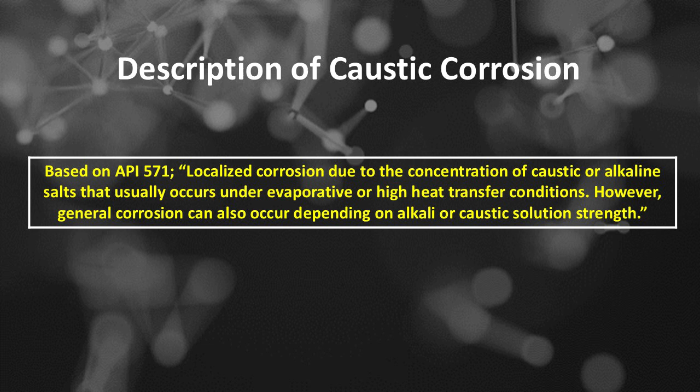Number 1 is caustic corrosion damage definition. Caustic corrosion refers to the degradation of materials, typically metals, due to the corrosive effects of alkaline substances, specifically those containing hydroxide ions, OH. This type of corrosion is often associated with environments where caustic substances, such as sodium hydroxide, caustic soda, potassium hydroxide, or other alkaline solutions, are present.

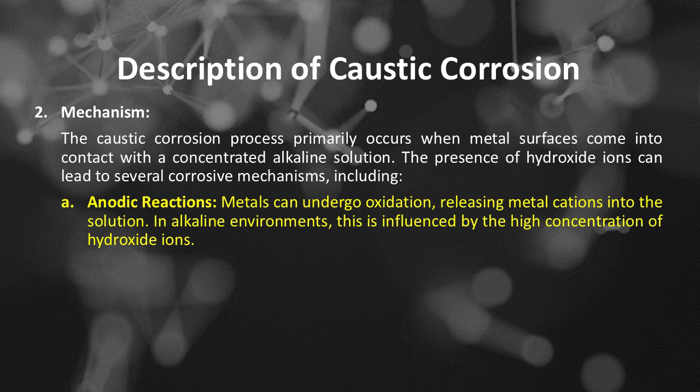Caustic corrosion is particularly significant in industries that utilize strong bases, such as chemical processing, pulp and paper manufacturing, and petroleum refining. Number 2 is mechanism. The caustic corrosion process primarily occurs when metal surfaces come into contact with a concentrated alkaline solution. The presence of hydroxide ions can lead to several corrosive mechanisms, including: Number A of corrosive mechanisms is anodic reactions. Metals can undergo oxidation, releasing metal cations into the solution. In alkaline environments, this is influenced by the high concentration of hydroxide ions.

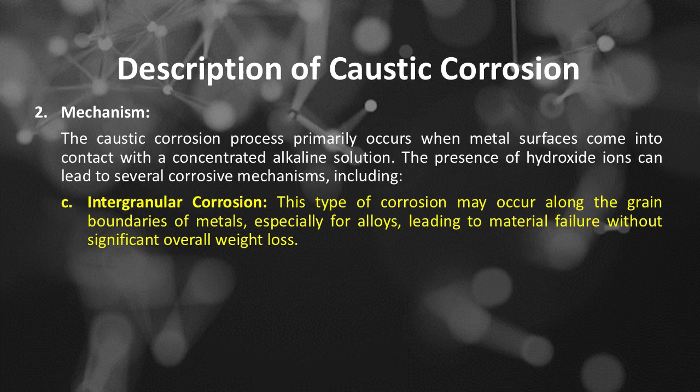Number B of corrosive mechanisms is localized attack. Caustic corrosion can cause localized attack, often referred to as caustic stress corrosion cracking, SCC. This phenomenon occurs when stress is applied to susceptible metals, resulting in the formation of cracks that propagate through the metal structure. Number C of corrosive mechanisms is intergranular corrosion. This type of corrosion may occur along the grain boundaries of metals, especially for alloys, leading to material failure without significant overall weight loss. Number 3 is affected materials.

While many materials can be affected by caustic corrosion, certain metals and alloys are more susceptible, including carbon steel, commonly used in various applications but can suffer from caustic corrosion, particularly in high-temperature and high-pressure environments. Certain stainless steels. While stainless steels have good corrosion resistance, certain grades may still be vulnerable, especially when exposed to elevated temperatures and stress. Copper and alloys. Copper and its alloys may experience accelerated corrosion when exposed to caustic environments.

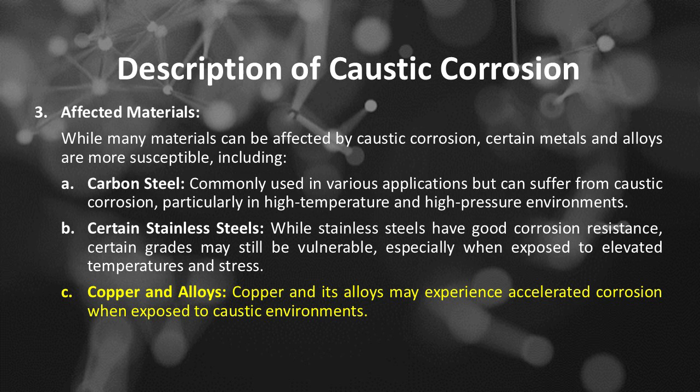Number 4 is conditions that promote caustic corrosion. High pH levels. The corrosivity increases significantly as pH levels rise, particularly above pH 12. Temperature. Elevated temperatures can exacerbate the effects of caustic corrosion by increasing reaction rates. Aeration. The presence of oxygen can facilitate electrochemical corrosion processes. Concentration of caustic solution. Increased concentration of hydroxide ions enhances corrosion rates, particularly in closed or poorly ventilated systems.

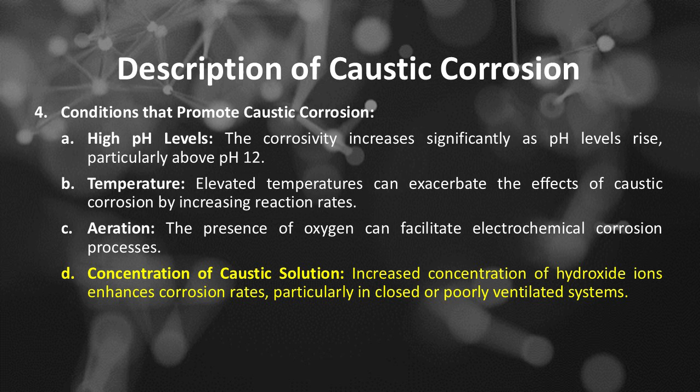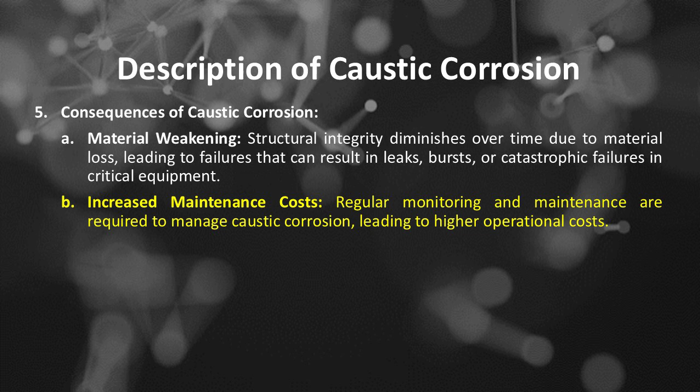Number 5 is consequences of caustic corrosion. Number A is material weakening. Structural integrity diminishes over time due to material loss, leading to failures that can result in leaks, bursts, or catastrophic failures in critical equipment. Number B is increased maintenance costs. Regular monitoring and maintenance are required to manage caustic corrosion, leading to higher operational costs. Number C is safety hazards. Structural failures can pose significant safety risks to personnel and can lead to environmental contamination in the case of spills.

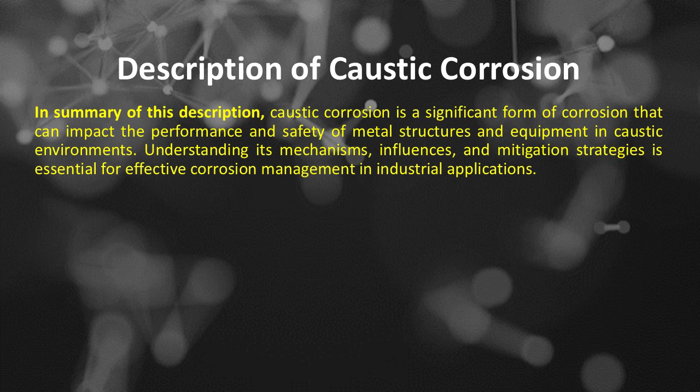In summary of this description, caustic corrosion is a significant form of corrosion that can impact the performance and safety of metal structures and equipment in caustic environments. Understanding its mechanisms, influences, and mitigation strategies is essential for effective corrosion management in industrial applications.

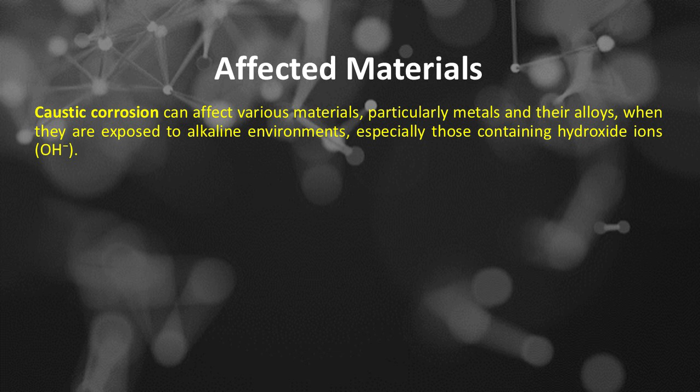Caustic corrosion affected materials based on API 571: primarily carbon steel, low alloy steels and 300 series SS. Caustic corrosion can affect various materials, particularly metals and their alloys, when they are exposed to alkaline environments, especially those containing hydroxide ions, OH. The following materials are commonly affected by caustic corrosion. Number 1 is carbon steel. Carbon steel vulnerability: carbon steel is particularly susceptible to caustic corrosion, especially in high-temperature and high-pressure environments. Carbon steel consequences: corrosion can lead to pitting, loss of structural integrity, and potentially catastrophic failure if not monitored and maintained.

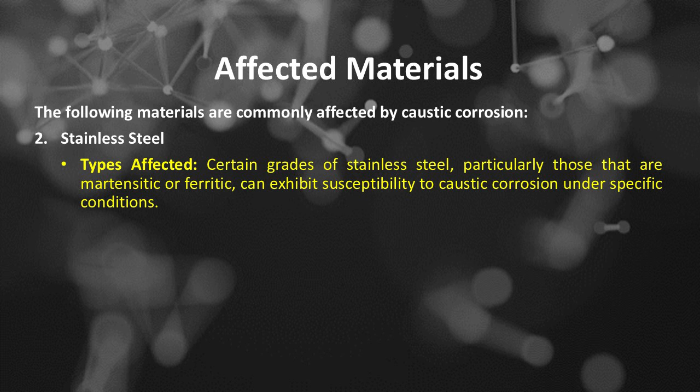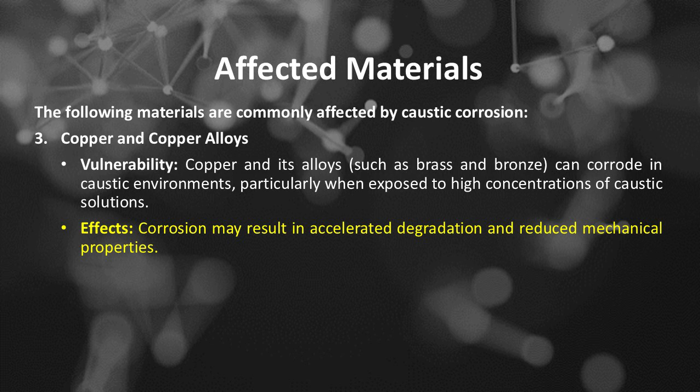Number 2 is stainless steel. Stainless steel types affected: certain grades of stainless steel, particularly those that are martensitic or ferritic, can exhibit susceptibility to caustic corrosion under specific conditions. Stainless steel mechanism: localized corrosion, such as stress corrosion cracking, SCC, can occur when stainless steels are exposed to high pH environments combined with tensile stress. Number 3 is copper and copper alloys. Copper and copper alloys vulnerability: copper and its alloys, such as brass and bronze, can corrode in caustic environments, particularly when exposed to high concentrations of caustic solutions. Effects: corrosion may result in accelerated degradation and reduced mechanical properties. Number 4 is aluminum and aluminum alloys.

Aluminum and aluminum alloys corrosion behavior: aluminum is generally resistant to corrosion, however it can be susceptible to caustic corrosion, particularly in concentrated alkaline solutions that can attack the protective oxide layer. Caustic environments can lead to pitting and localized attack.

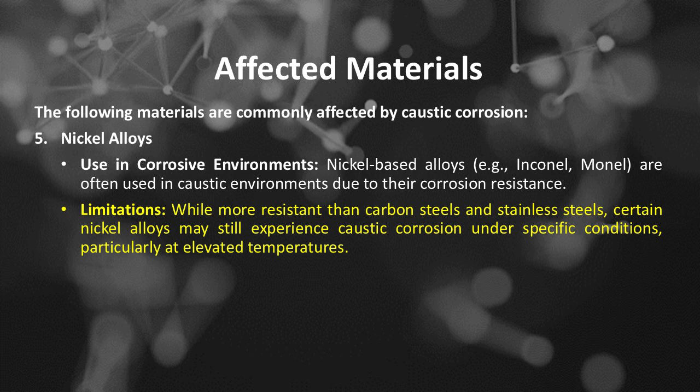Number 5 is nickel alloys. Nickel alloys use in corrosive environments: nickel-based alloys such as Inconel and Monel are often used in caustic environments due to their corrosion resistance. Nickel alloys limitations: while more resistant than carbon steels and stainless steels, certain nickel alloys may still experience caustic corrosion under specific conditions, particularly at elevated temperatures.

Number 6 is titanium. Titanium general resistance: titanium exhibits good resistance to a wide range of corrosive environments, including alkalinity. However, in some high-stress conditions or at elevated temperatures, caustic corrosion can occur. Titanium applications: while less common, caustic corrosion can affect titanium components in specialized applications.

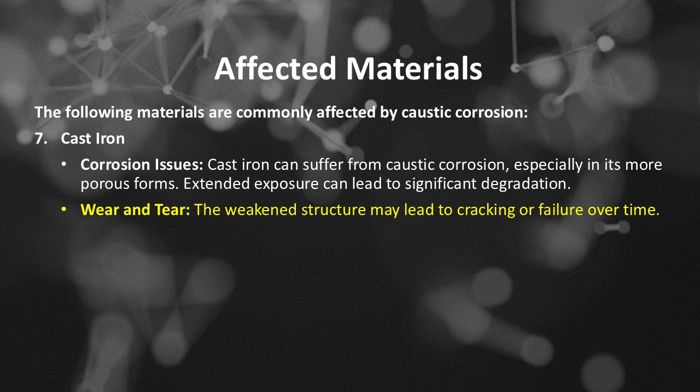Number 7 is cast iron. Cast iron corrosion issues: cast iron can suffer from caustic corrosion, especially in its more porous forms. Extended exposure can lead to significant degradation. Cast iron wear and tear: the weakened structure may lead to cracking or failure over time.

Understanding the susceptibility of these materials to caustic corrosion is crucial in industries such as chemical processing, pulp and paper manufacturing, and oil and gas. Selecting appropriate materials and employing effective protective measures can help mitigate the risks associated with caustic corrosion.

Caustic corrosion critical factors based on API 571. Major contributing factors are the presence of caustic, NaOH or KOH. The following are sources of caustic.

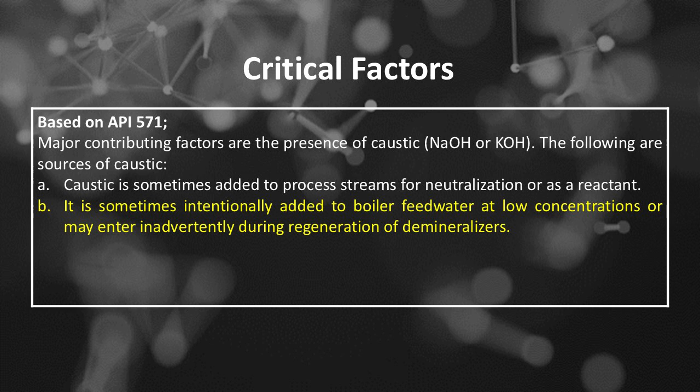A. Caustic is sometimes added to process streams for neutralization or as a reactant. B. It is sometimes intentionally added to boiler feedwater at low concentrations or may enter inadvertently during regeneration of demineralizers. C. Alkaline salts may also enter process streams through leaks in condensers or process equipment.

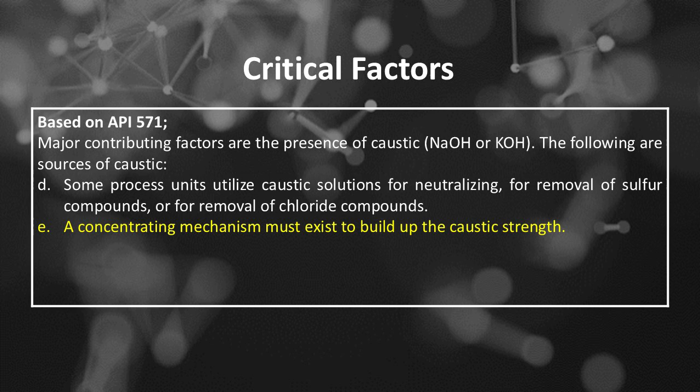D. Some process units utilize caustic solutions for neutralizing, for removal of sulfur compounds, or for removal of chloride compounds. E. A concentrating mechanism must exist to build up the caustic strength. F. Caustic may become concentrated by departure from nucleate boiling (DNB), evaporation, and deposition.

The occurrence and severity of caustic corrosion damage are influenced by several critical factors. Understanding these factors is essential for predicting corrosion behavior, preventing material degradation, and ensuring the longevity and safety of equipment and structures exposed to caustic environments. Here are the caustic corrosion damage key critical factors.

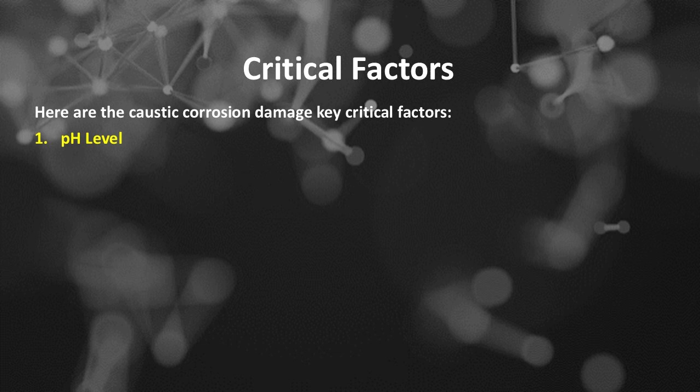Number 1 is pH level and alkaline concentration. Caustic corrosion is most pronounced in environments with high pH levels, especially above pH 12. Higher concentrations of hydroxide ions, OH, increase the corrosivity of the solution and contribute to accelerated metal degradation.

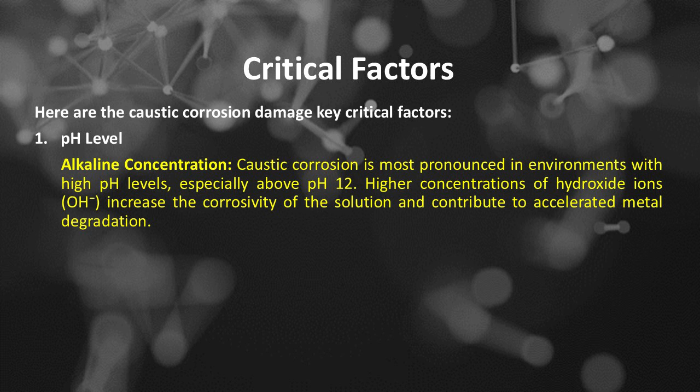Number 2 is temperature, increased reaction rates. Elevated temperatures can accelerate the corrosion process by increasing the kinetic energy of chemical reactions. The rate of caustic corrosion typically increases with temperature, leading to faster degradation of materials.

Number 3 is material properties, material selection. Different materials have varying susceptibilities to caustic corrosion. For instance, carbon steel is more vulnerable than certain stainless steels or nickel-based alloys. The alloying elements and microstructure play vital roles in determining the corrosion resistance of a material.

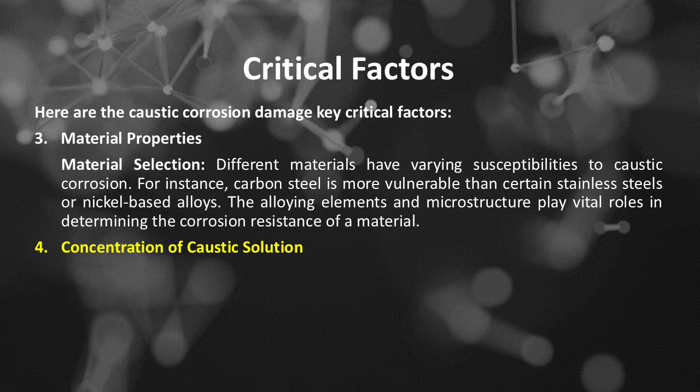Number 4 is concentration of caustic solution. Higher concentration effects: the presence of concentrated caustic solutions can lead to more severe corrosion than diluted solutions. The concentration of hydroxide ions directly influences the corrosion rate and the severity of damage.

Number 5 is stress and strain, stress corrosion cracking. The presence of tensile stress in materials, whether from operational loads or environmental factors, can lead to localized phenomena like stress corrosion cracking, SCC, when combined with caustic environments. This can significantly undermine structural integrity.

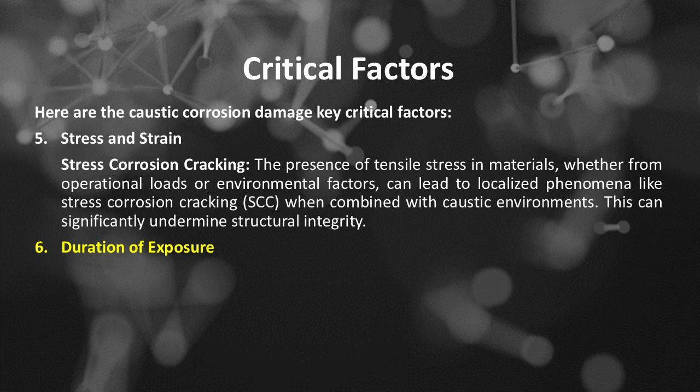Number 6 is duration of exposure, cumulative damage. Prolonged exposure to caustic environments increases the likelihood of corrosion damage. Over time, even materials with good initial resistance can suffer significant degradation.

Number 7 is presence of oxygen, aeration effects. The presence of oxygen can exacerbate the corrosive process by facilitating electrochemical reactions. Oxygen can promote the formation of rust in iron or enhance corrosion in various metals interacting with caustic solutions.

Number 8 is electrolyte characteristics, conductivity and composition. The conductivity of the caustic solution and the presence of impurities or other ions can influence the rate and nature of corrosion. For example, certain anions, like chlorides, can lead to synergistic effects, increasing corrosion rates.

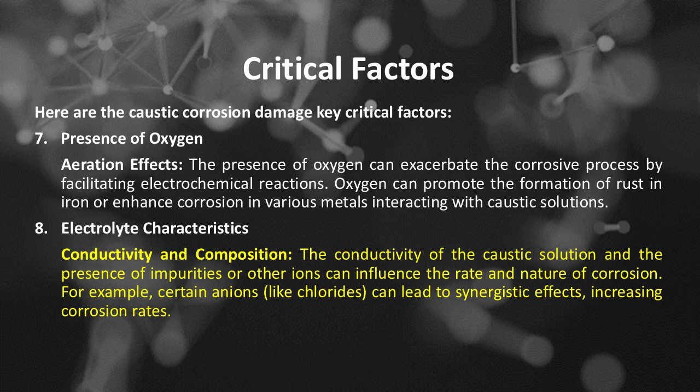Number 9 is surface conditions, surface finish and coatings. The condition of the material's surface, including roughness, presence of coatings, and any protective barriers, can significantly impact the rate of corrosion. Smooth surfaces may resist corrosion better, while rough or damaged surfaces can promote localized attacks.

Number 10 is fluid dynamics, flow conditions.

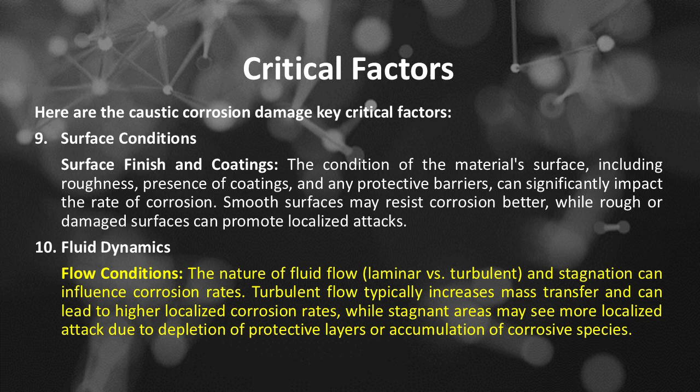The nature of fluid flow, laminar versus turbulent, and stagnation can influence corrosion rates. Turbulent flow typically increases mass transfer and can lead to higher localized corrosion rates, while stagnant areas may see more localized attack due to depletion of protective layers or accumulation of corrosive species.

Number 11 is chemical additives, inhibitors. The addition of corrosion inhibitors or other chemicals can modify the corrosive behavior of caustic solutions. Inhibitors can form protective films on the metal surface, reducing the impact of caustic corrosion.

Understanding these factors allows engineers and maintenance personnel to implement effective strategies to mitigate caustic corrosion, enhancing the durability and reliability of materials and components in caustic environments.

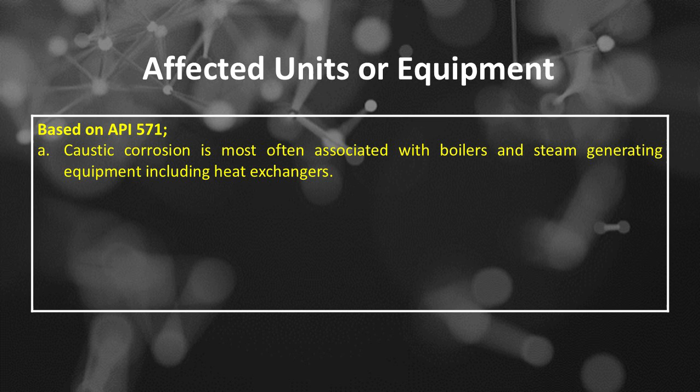Caustic corrosion affected units or equipment based on API 571. A. Caustic corrosion is most often associated with boilers and steam generating equipment, including heat exchangers. B. Similar concentrating effects of caustic may occur where caustic is added to crude unit charge. C. Accelerated localized corrosion can occur in preheat exchangers, furnace tubes and transfer lines, unless the caustic is effectively mixed in the oil stream. D. Units that use caustic for removing sulfur compounds from product streams.

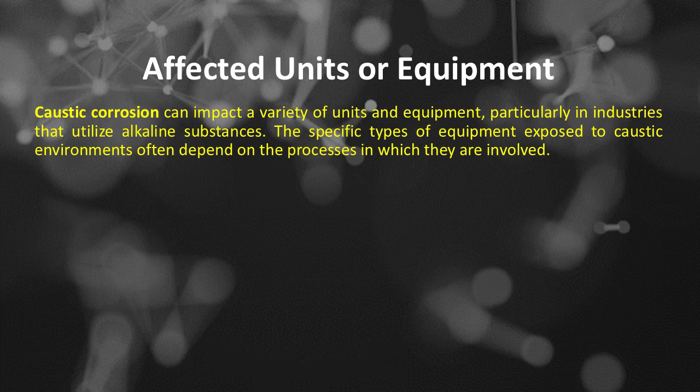Caustic corrosion can impact a variety of units and equipment, particularly in industries that utilize alkaline substances. The specific types of equipment exposed to caustic environments often depend on the processes in which they are involved. Here are some common types of units and equipment that can be affected by caustic corrosion.

Number 1 is pipelines and piping systems. Description: transport liquids that may contain caustic solutions. Risk: corrosion can lead to leaks, ruptures, and failures, potentially causing safety hazards and environmental damage.

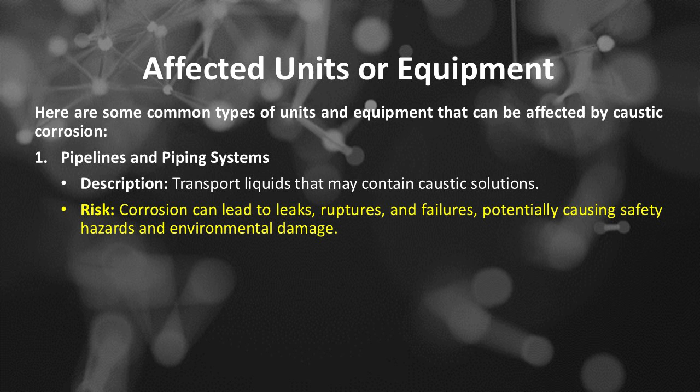Number 2 is pressure vessels. Description: used to contain gases or liquids at high pressures, including caustic solutions. Risk: caustic corrosion can weaken the vessel walls, leading to catastrophic failures, especially if stress corrosion cracking occurs.

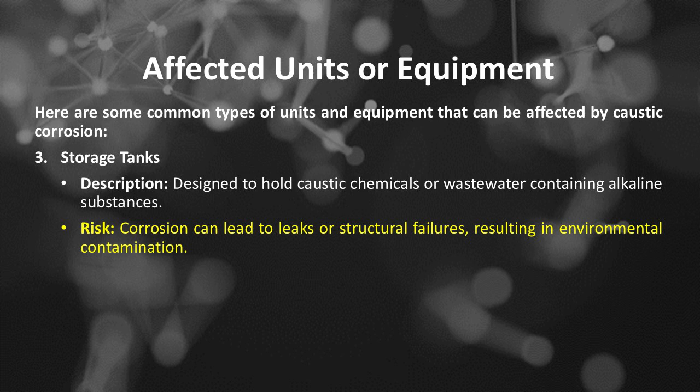Number 3 is storage tanks. Description: designed to hold caustic chemicals or wastewater containing alkaline substances. Risk: corrosion can lead to leaks or structural failures, resulting in environmental contamination.

Number 4 is heat exchangers. Description: used to transfer heat between two or more fluids, often involving caustic solutions. Risk: corrosion can diminish their efficiency, lead to blockages, and result in failure due to thinning of tube walls.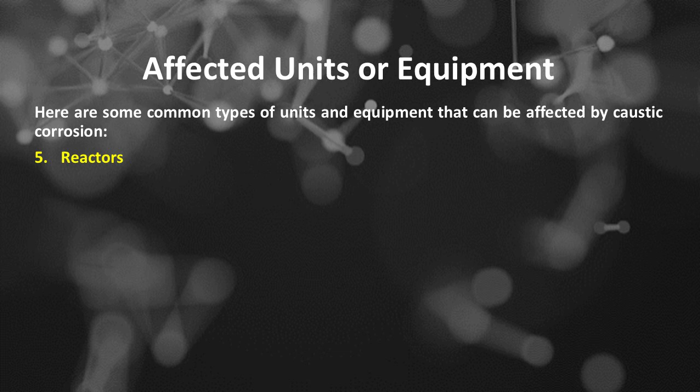Number 5 is reactors. Description: equipment designed for chemical reactions, sometimes involving caustic agents. Risk: direct contact with caustic materials can lead to corrosion damage, impacting reaction efficiency and safety.

Number 6 is boilers. Description: used for generating steam or hot water, sometimes using caustic treatments in water systems. Risk: corrosion can occur in the boiler tubes, leading to failures, leaks, or explosion risks.

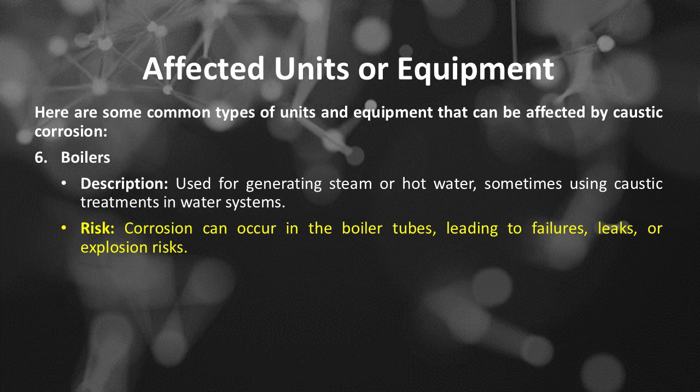Number 7 is pump components. Description: pumps that handle caustic fluids, including centrifugal and diaphragm pumps. Risk: components like impellers and casings can corrode over time, leading to leaks and equipment failure.

Number 8 is valves and fittings. Description: control the flow of caustic solutions in piping systems. Risk: corrosion can lead to valve failure, leaks, or faulty operation, impacting overall process safety.

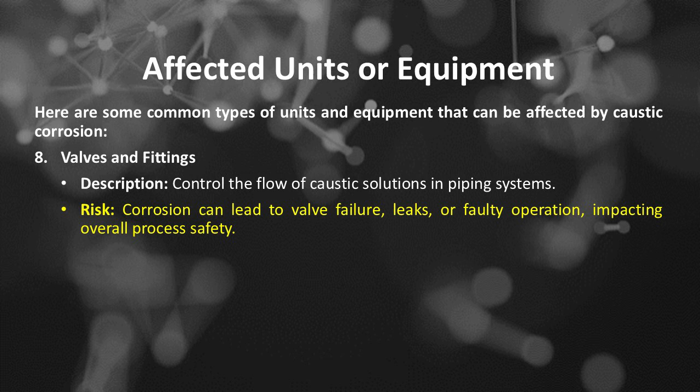Number 9 is heat treating furnaces. Description: used in heat treatment processes, which may involve caustic cleaning solutions. Risk: corrosion of furnace components can affect the temperature uniformity and efficiency.

Number 10 is distillation columns. Description: used in separation processes that might involve caustic properties. Risk: corrosion can affect the tray or packing materials, reducing separation efficiency and leading to structural issues.

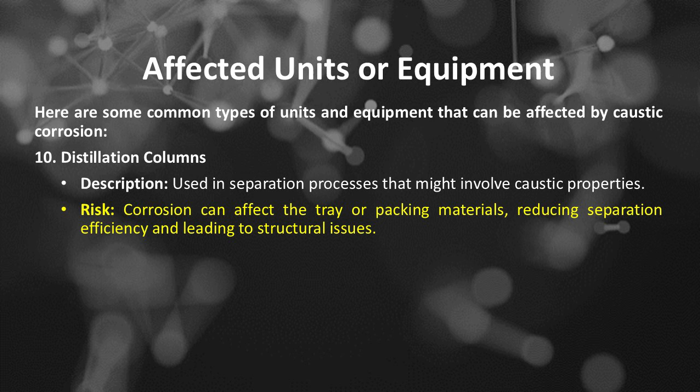Number 11 is cooling towers. Description: facilitate cooling of caustic solutions. Risk: corrosion can affect parts such as fill media and water distribution systems, reducing cooling efficiency and longevity.

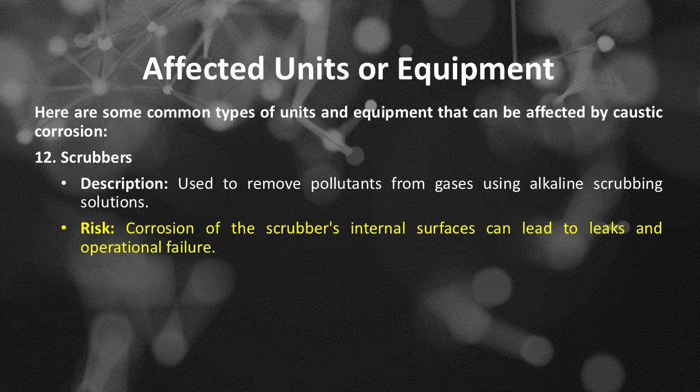Number 12 is scrubbers. Description: used to remove pollutants from gases using alkaline scrubbing solutions. Risk: corrosion of the scrubber's internal surfaces can lead to leaks and operational failure.

Number 13 is centrifuges. Description: employed in processes for separating materials with caustic interactions. Risk: parts such as bowls and rotors may experience wear and tear from caustic exposure.

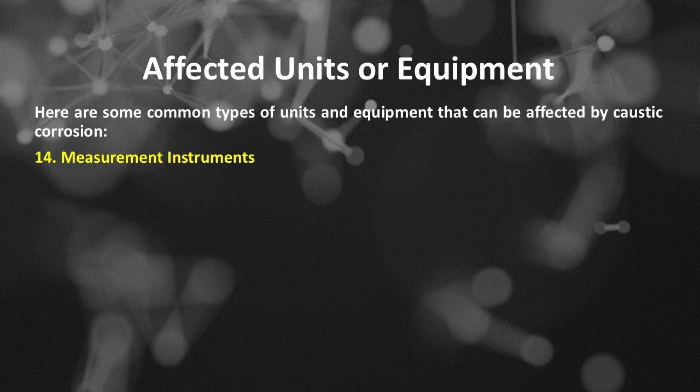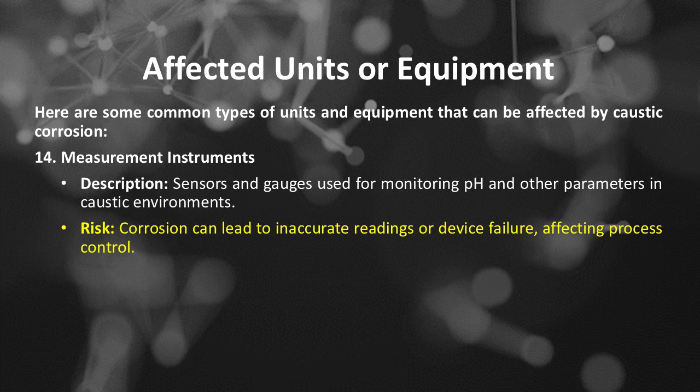Number 14 is measurement instruments. Description: sensors and gauges used for monitoring pH and other parameters in caustic environments. Risk: corrosion can lead to inaccurate readings or device failure, affecting process control.

Proper design, material selection, and maintenance strategies are crucial to mitigating the risks associated with caustic corrosion in these types of equipment. This includes using appropriate coatings, corrosion inhibitors, and regular inspection and monitoring practices.

Number B: deposits may fill corroded depressions and mask damage below. Probing suspect areas with a sharp instrument may be required.

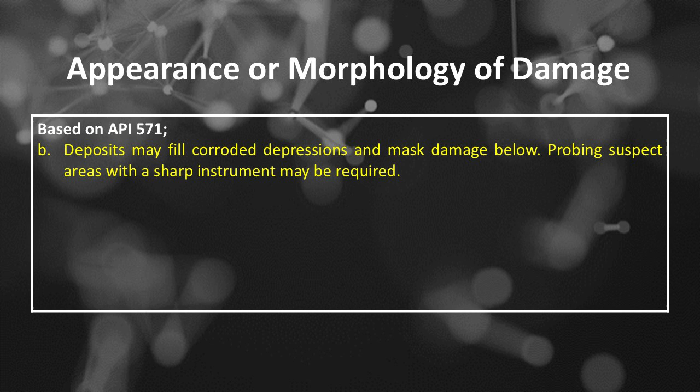Number C: localized gouging may result along a waterline where corrosives concentrate. In vertical tubes, this may appear as a circumferential groove. Number D: in horizontal or sloped tubes, grooving may appear at the top of the tube or as longitudinal grooves on opposite sides of the tube.

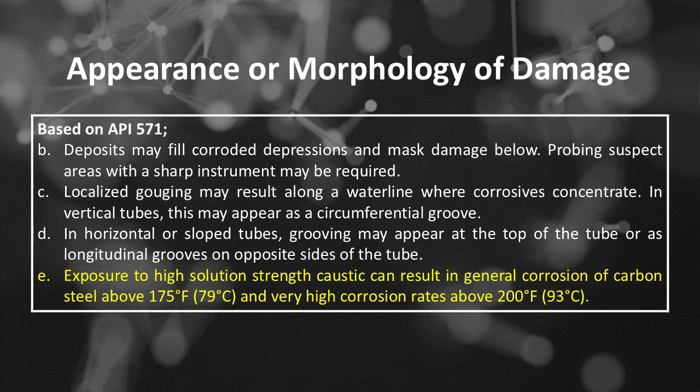Number E: exposure to high solution strength caustic can result in general corrosion of carbon steel above 175 degrees Fahrenheit or 79 degrees Celsius, and very high corrosion rates above 200 degrees Fahrenheit or 93 degrees Celsius.

Caustic corrosion can manifest in various forms, each exhibiting distinct morphological characteristics. Understanding the appearance of caustic corrosion damage is crucial for identifying issues early and implementing appropriate maintenance strategies. Here are the typical appearances and morphology associated with caustic corrosion.

Number 1 is pitting corrosion. Pitting corrosion appearance: small, localized depressions or pits that penetrate the metal surface. The pits may vary in size and depth. Pitting corrosion occurs due to localized attacks, often exacerbated by the presence of contaminants and uneven flow conditions in a caustic environment.

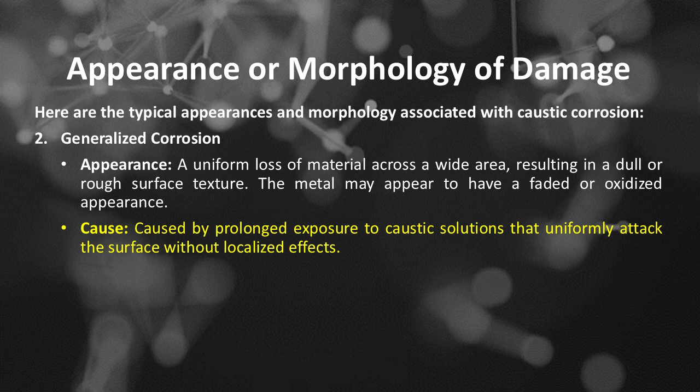Number 2 is generalized corrosion. Generalized corrosion appearance: a uniform loss of material across a wide area, resulting in a dull or rough surface texture. The metal may appear to have a faded or oxidized appearance. Generalized corrosion is caused by prolonged exposure to caustic solutions that uniformly attack the surface without localized effects.

Number 3 is stress corrosion cracking, or SCC. Stress corrosion cracking appearance: visible cracks that can form on or near welds, joints, or areas of high stress. These cracks may appear as fine fissures or larger cracks, often following the grain structure of the metal. Stress corrosion cracking occurs due to the combined effects of tensile stress and a caustic environment, leading to crack propagation over time.

Number 4 is intergranular corrosion. Intergranular corrosion appearance: darkened lines or zones along the grain boundaries, often leading to a network appearance. The surfaces may exhibit a granular or frosted look where the metal has been corroded. Intergranular corrosion results from the attack on the grain boundaries of certain alloys, particularly susceptible materials like stainless steel in caustic environments.

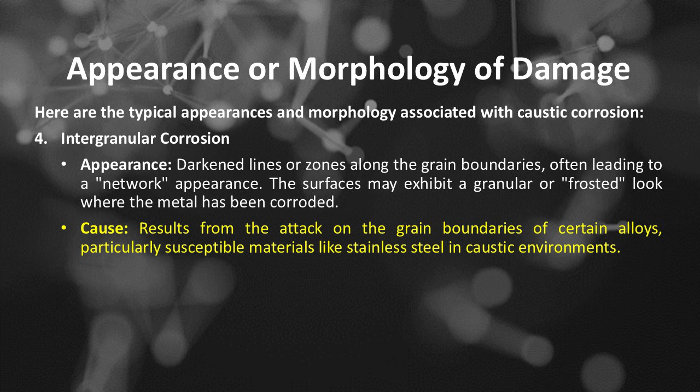Number 5 is uniform material loss. Uniform material loss appearance: smooth, well-defined edges around the corroded area. The metal surface may show a general reduction in thickness and a dull finish, without localized features. Uniform material loss is often a result of consistent exposure to caustic solutions, affecting large areas of the surface evenly.

Number 6 is erosion corrosion. Erosion corrosion appearance: a combination of pitting and grooves that appear on surfaces, often with a characteristic wash pattern indicating the action of fluid flow. This process occurs when mechanical wear from fluid movement enhances the effect of corrosive attack, frequently seen in areas of high turbulence.

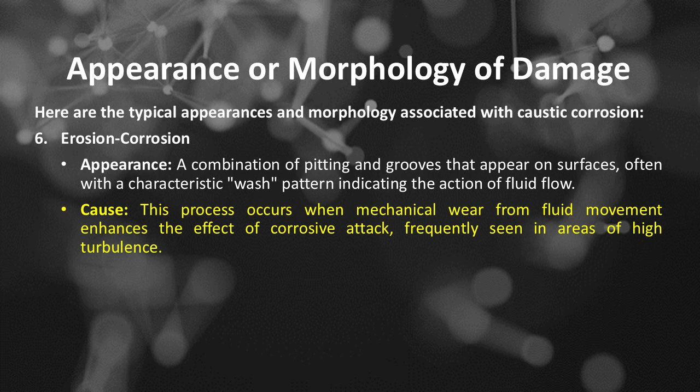Number 7 is corrosion under insulation, or CUI. Corrosion under insulation appearance: discoloration, rust, or corrosion marks beneath insulation materials. This may not be visible until the insulation is removed. Moisture and caustic environments often become trapped underneath insulation, leading to localized corrosion.

Number 8 is white rust formation. White rust formation appearance: a white, powdery deposit, often seen on galvanized steel. This deposit indicates corrosion, especially in caustic or humid environments. It is formed by the reaction of zinc with caustic solutions, resulting in the corrosion of the zinc coating.

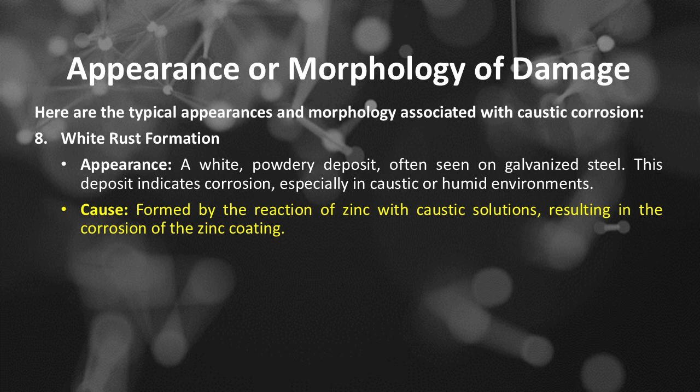Number 9 is surface roughness and discoloration. Appearance: increased surface roughness, with a mottled or uneven texture, often accompanied by discoloration, e.g., darkening, rusting. This results from non-homogeneous attack leading to localized loss of material and changes in the surface finish.

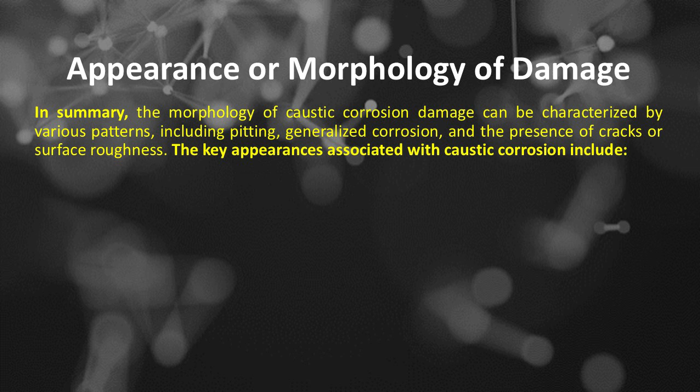In summary, the morphology of caustic corrosion damage can be characterized by various patterns, including pitting, generalized corrosion, and the presence of cracks or surface roughness. The key appearances associated with caustic corrosion include:

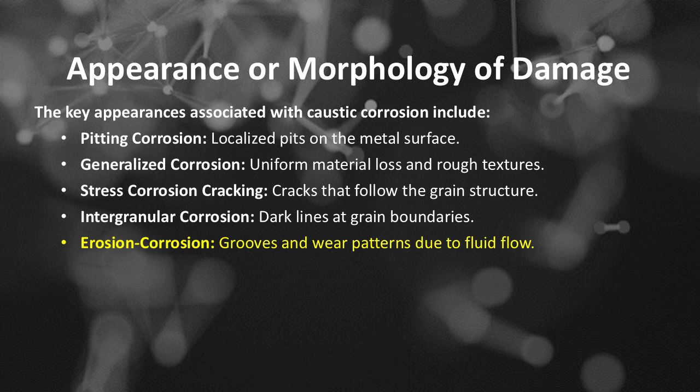Pitting corrosion: localized pits on the metal surface. Generalized corrosion: uniform material loss and rough textures. Stress corrosion cracking: cracks that follow the grain structure. Intergranular corrosion: dark lines at grain boundaries. Erosion corrosion: grooves and wear patterns due to fluid flow. Corrosion under insulation, or CUI: hidden corrosion beneath insulation.

White rust formation, powdery white deposits on galvanized materials. Surface roughness and discoloration, dullness and uneven texture of the metal. Recognizing these morphological features is essential for assessing the extent of corrosion damage, planning maintenance, and selecting appropriate materials for caustic environments.

Caustic corrosion damage prevention and mitigation based on API 571, Number A: in steam generating equipment, caustic corrosion is best prevented through proper design.

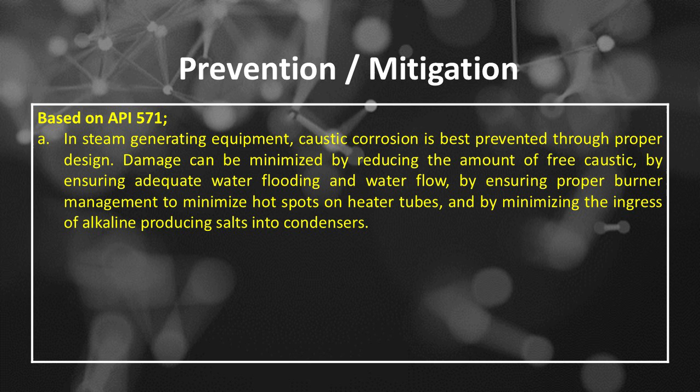Damage can be minimized by reducing the amount of free caustic, by ensuring adequate water flooding and water flow, by ensuring proper burner management to minimize hot spots on heater tubes, and by minimizing the ingress of alkaline-producing salts into condensers. Number B, in process equipment, caustic injection facilities should be designed to allow proper mixing and dilution of caustic in order to avoid the concentration of caustic on hot metal surfaces.

Number C, carbon steel and 300 series SS have serious corrosion problems in high-strength caustic solutions above about 150 degrees Fahrenheit, 66 degrees Celsius. Alloy 400 and some other nickel-base alloys exhibit much lower corrosion rates.

Preventing caustic corrosion damage involves a combination of material selection, design considerations, operational practices, and maintenance strategies. Here are some effective prevention and mitigation techniques for caustic corrosion.

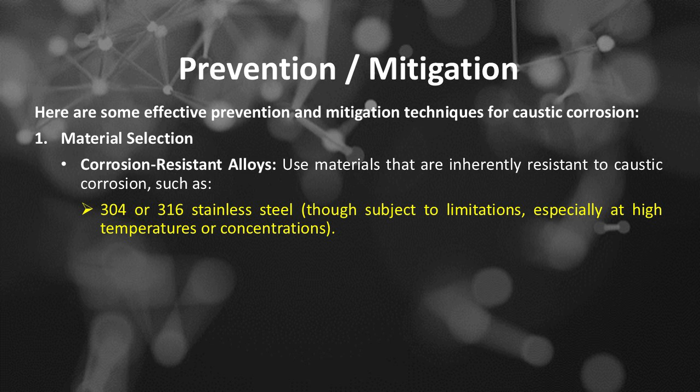Corrosion-resistant alloys: use materials that are inherently resistant to caustic corrosion, such as 304 or 316 stainless steel, though those are subject to limitations, especially at high temperatures or concentrations. Nickel alloys, such as Hastelloy and Monel, have excellent corrosion resistance in caustic environments. Titanium and certain plastics, like PVC and HDPE, are used for specific applications. Surface coatings: apply protective coatings, such as epoxy or polyurethane, to create a barrier between the metal and the caustic environment.

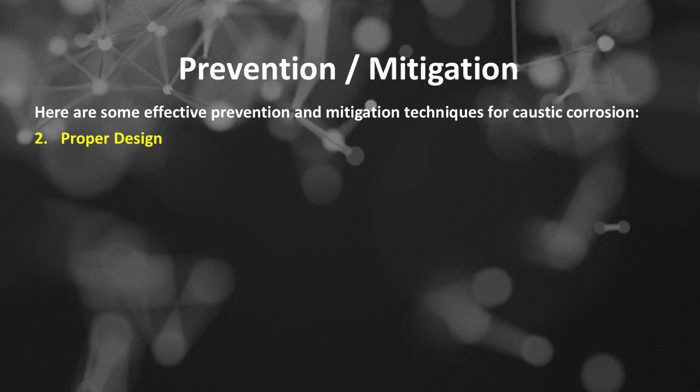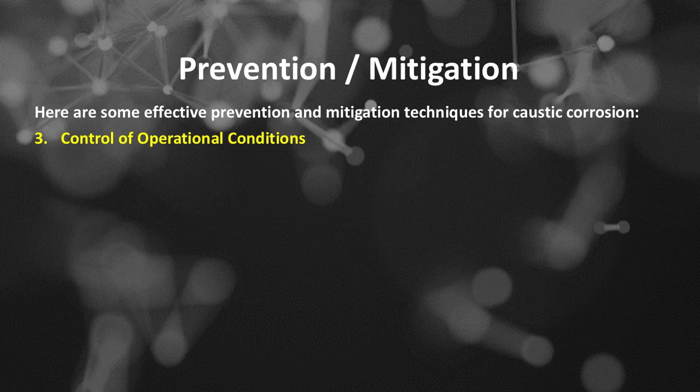Number 2 is proper design. Avoiding traps: design piping and equipment layouts to minimize dead legs, stagnation points, and low-flow areas where caustic can pool and cause localized corrosion. Proper drainage: ensure that layout allows for proper drainage to avoid the accumulation of liquids that can cause corrosion. Weldments and joints: use high-quality welding techniques and keep joints and welds smooth and free of defects that can harbor corrosion.

Number 3 is control of operational conditions. Temperature control: maintain lower operating temperatures where possible since higher temperatures can exacerbate caustic corrosion. Concentration management: dilute caustic concentrations when feasible to reduce corrosive effects on materials. Flow rate control: ensure adequate flow rates to prevent stagnant areas, but avoid excess turbulence that could lead to erosion corrosion.

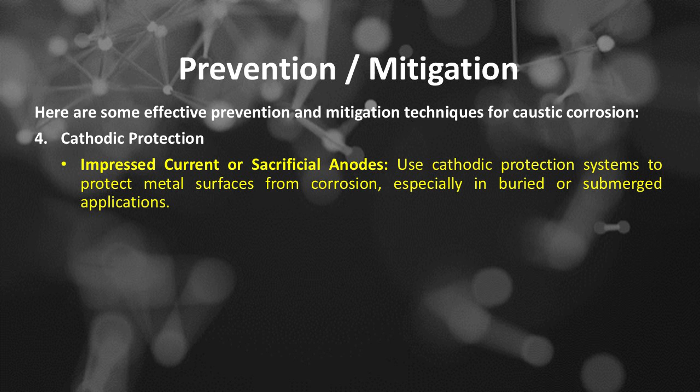Number 4 is cathodic protection. Impressed current or sacrificial anodes: use cathodic protection systems to protect metal surfaces from corrosion, especially in buried or submerged applications.

Number 5 is regular maintenance and monitoring. Inspection programs: implement regular visual and non-destructive testing, or NDT, inspection programs to detect early signs of corrosion. Thickness monitoring: use thickness gauges to monitor the integrity of critical components over time. Repair protocols: establish protocols for fast and effective repair of corroded areas to prevent failure.

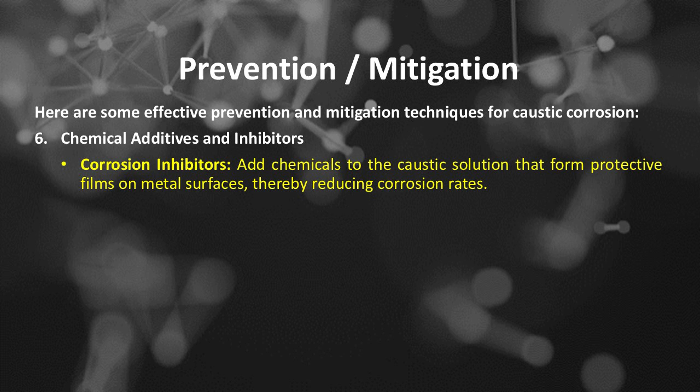Number 6 is chemical additives and inhibitors. Corrosion inhibitors: add chemicals to the caustic solution that form protective films on metal surfaces, thereby reducing corrosion rates. pH control: maintain optimal pH levels to minimize corrosive environments, although care must be taken to avoid excessive alkalinity.

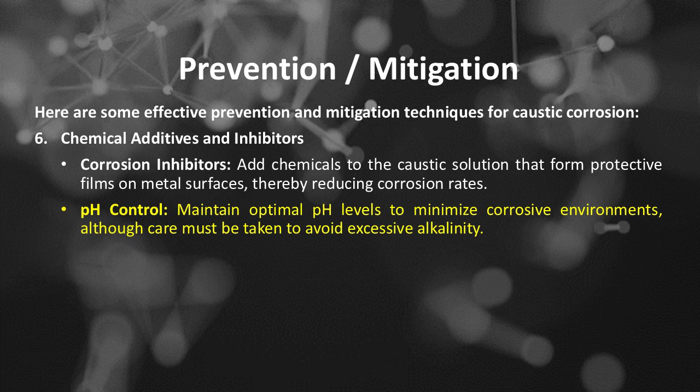Number 7 is insulation and environmental control. Proper insulation: utilize insulation materials that do not retain moisture and are resistant to chemical attacks. Ensure that they are applied correctly to prevent moisture accumulation. Humidity control: maintain low humidity levels in areas surrounding equipment to minimize the risk of corrosion.

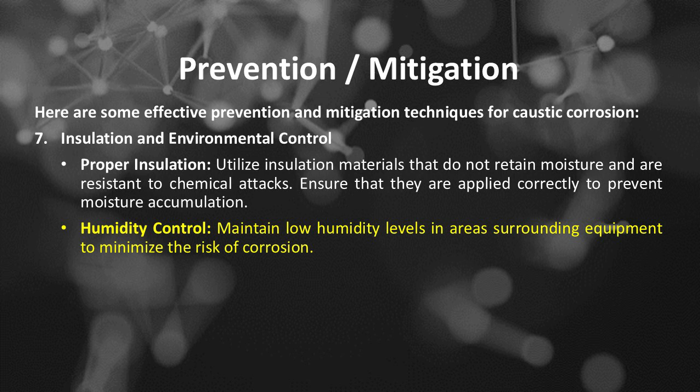Number 8 is education and training. Employee training: train staff on the hazardous effects of caustic environments and the importance of maintenance and inspection procedures.

Number 9 is design for maintenance. Accessibility: design systems to allow easy access for inspection and maintenance, enabling quick response to any signs of corrosion.

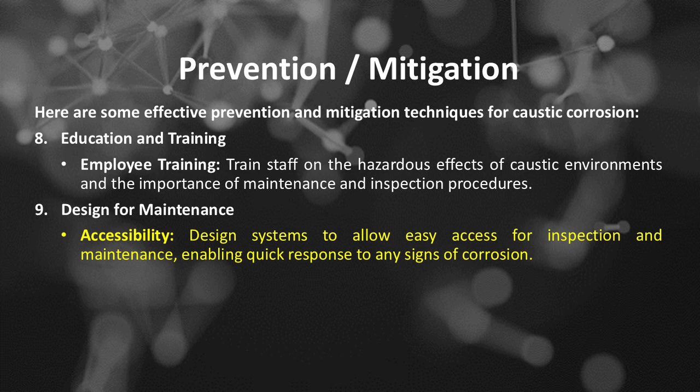In summary, effectively preventing caustic corrosion damage involves a multifaceted approach, including material selection: use resistant alloys and coatings. Design considerations: optimize layouts to avoid traps and stagnation. Operational controls: manage temperature, concentration, and flow rate. Cathodic protection: implement systems to reduce corrosion potential.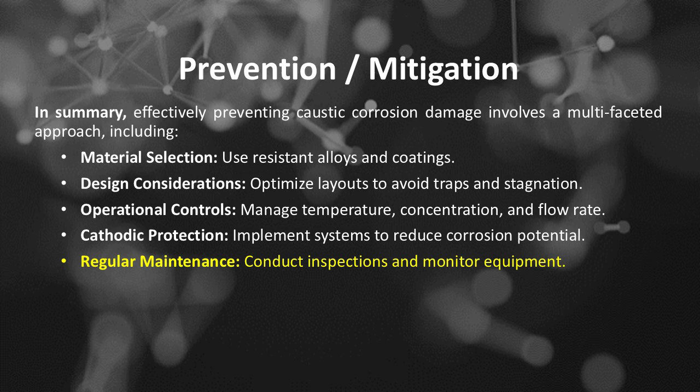Regular maintenance: conduct inspections and monitor equipment. Chemical additives: utilize corrosion inhibitors and monitor pH levels. Insulation: ensure appropriate and moisture-resistant insulation. Education: provide training for personnel on corrosion risks. By implementing these strategies, organizations can significantly reduce the incidence of caustic corrosion, prolonging the life of their equipment and ensuring operational safety. Caustic corrosion inspection and monitoring based on API 571, Number A.

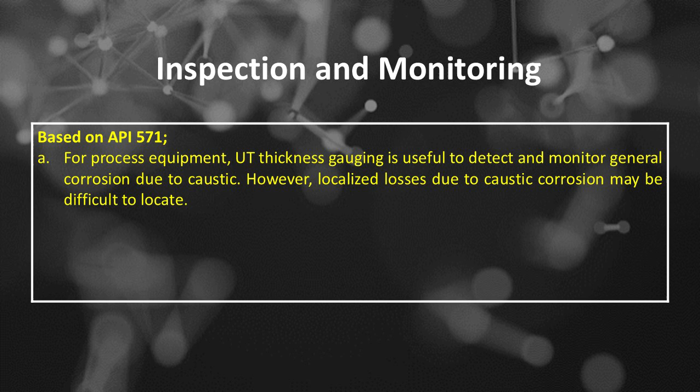For process equipment, UT thickness gauging is useful to detect and monitor general corrosion due to caustic. However, localized losses due to caustic corrosion may be difficult to locate. Number B, injection points should be inspected in accordance with API 570. Number C.

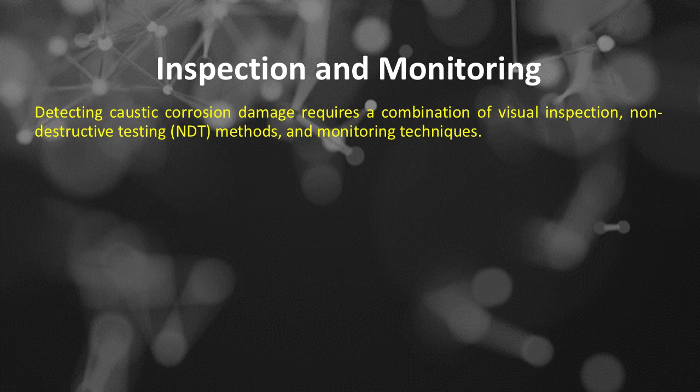UT scans and radiography can be used. Steam generation equipment may require visual inspection with the use of a borescope. Detecting caustic corrosion damage requires a combination of visual inspection, non-destructive testing (NDT) methods, and monitoring techniques. Here are several effective inspection and monitoring methods commonly used.

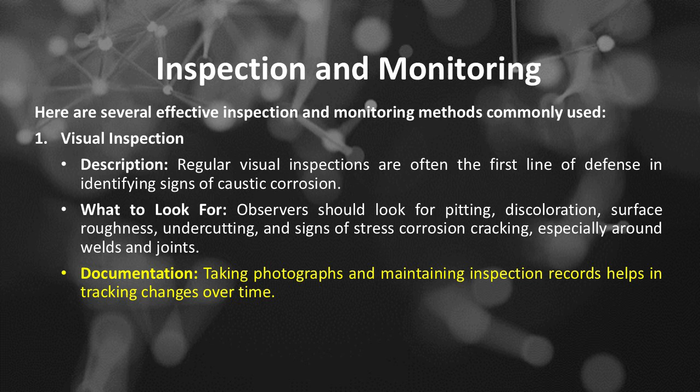Number 1 is visual inspection. Regular visual inspections are often the first line of defense in identifying signs of caustic corrosion. Observers should look for pitting, discoloration, surface roughness, undercutting, and signs of stress corrosion cracking, especially around welds and joints. Taking photographs and maintaining inspection records helps in tracking changes over time.

Number 2 is ultrasonic testing, or UT. Ultrasonic testing uses high-frequency sound waves to measure the thickness of materials and detect flaws. It is particularly effective for identifying pitting and general corrosion, as well as monitoring the thickness of critical components over time. This method is non-invasive and provides precise measurements of wall thickness.

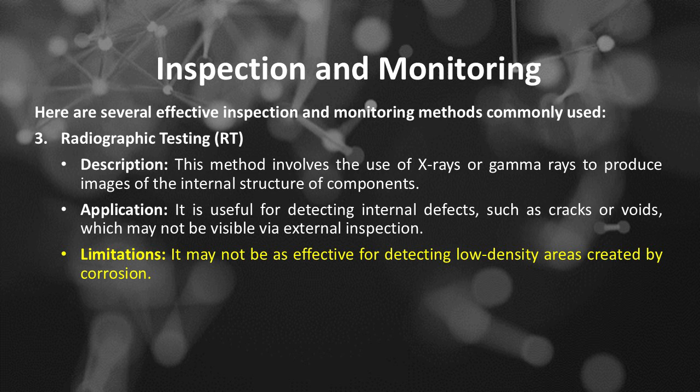Number 3 is radiographic testing, or RT. This method involves the use of X-rays or gamma rays to produce images of the internal structure of components. It is useful for detecting internal defects, such as cracks or voids, which may not be visible via external inspection. However, it may not be as effective for detecting low-density areas created by corrosion.

Number 4 is magnetic particle testing, or MT. This method detects surface and near-surface discontinuities through the use of magnetic particles. It is valuable for identifying cracks or flaws on ferromagnetic materials, and is quick and effective for detecting surface cracks.

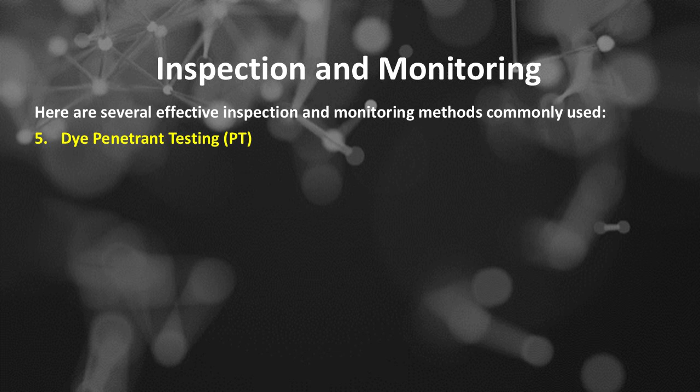Number 5 is dye penetrant testing, or PT. A liquid dye is applied to the surface, and after a dwell time, it is drawn out of imperfections by a developer. It is effective for detecting surface breaking defects like cracks and pits, but it is not suitable for use on porous materials or where heat treatment has been applied.

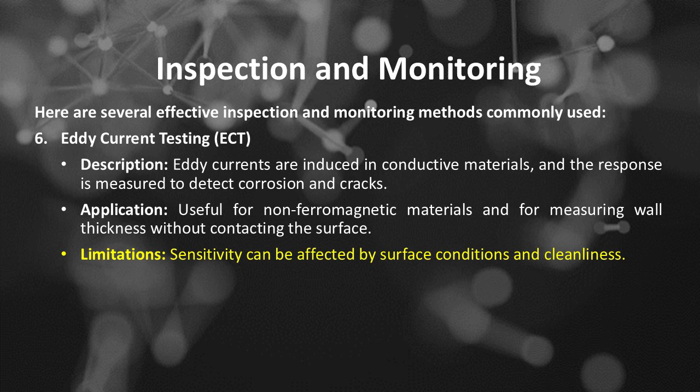Number 6 is eddy current testing, or ECT. Eddy currents are induced in conductive materials, and the response is measured to detect corrosion and cracks. It is useful for nonferromagnetic materials and for measuring wall thickness without contacting the surface. However, sensitivity can be affected by surface conditions and cleanliness.

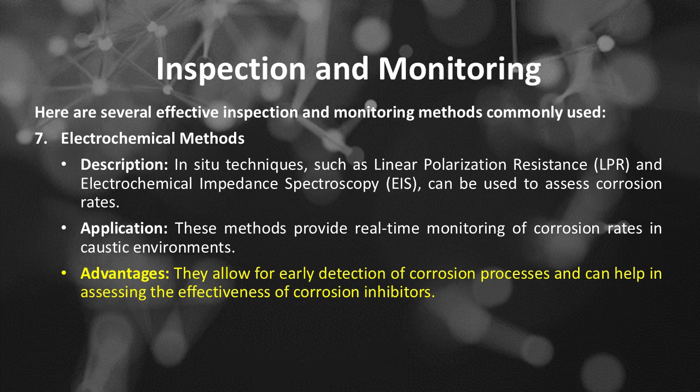Number 7 is electrochemical methods. In situ techniques, such as linear polarization resistance (LPR) and electrochemical impedance spectroscopy (EIS), can be used to assess corrosion rates. These methods provide real-time monitoring of corrosion rates in caustic environments, allowing for early detection of corrosion processes and helping assess the effectiveness of corrosion inhibitors.

Number 8 is corrosion monitoring probes. Installed probes measure electrical resistance or other parameters to provide continuous monitoring of corrosion. They can be placed in representative locations within the system to give real-time data on corrosion rates, useful for ongoing monitoring to detect corrosion trends over time.

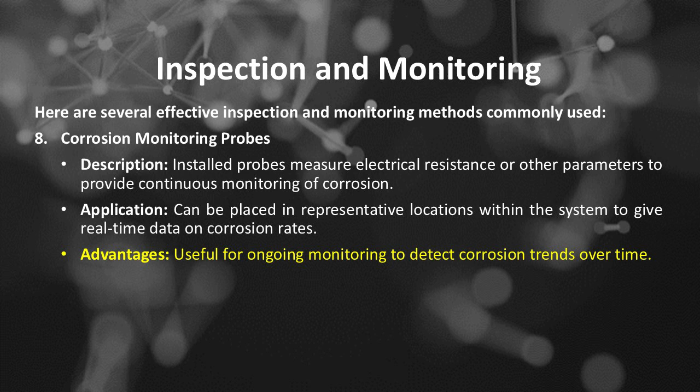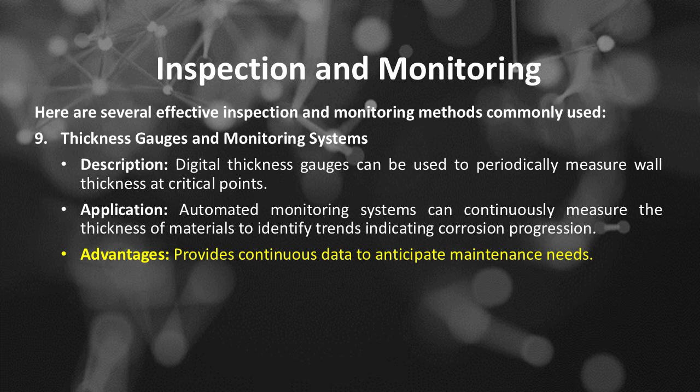Number 9 is thickness gauges and monitoring systems. Digital thickness gauges can be used to periodically measure wall thickness at critical points. Automated monitoring systems can continuously measure the thickness of materials to identify trends indicating corrosion progression, providing continuous data to anticipate maintenance needs.

Number 10 is infrared thermography. This non-contact inspection method uses infrared cameras to detect temperature differences caused by corrosion or insulation failures. It is useful for identifying areas of heat loss or abnormal thermal patterns that may indicate underlying corrosion or moisture intrusion, and is quick and effective for assessing large areas.

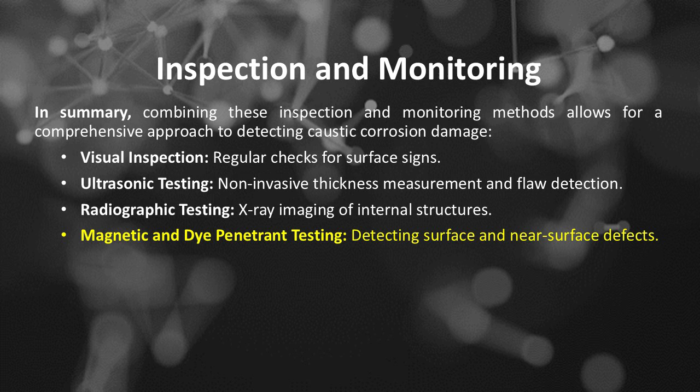In summary, combining these inspection and monitoring methods allows for a comprehensive approach to detecting caustic corrosion damage. Visual inspection provides regular checks for surface signs. Ultrasonic testing gives non-invasive thickness measurement and flaw detection. Radiographic testing allows X-ray imaging of internal structures. Magnetic and dye penetrant testing detect surface and near-surface defects.

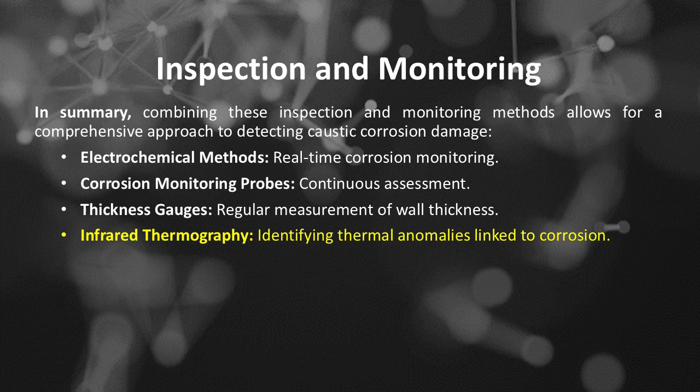Eddy current testing provides non-invasive detection in conductive materials. Electrochemical methods allow real-time corrosion monitoring. Corrosion monitoring probes offer continuous assessment. Thickness gauges provide regular measurement of wall thickness. Infrared thermography helps identify thermal anomalies linked to corrosion. Using a combination of these methods can provide reliable data for assessing the condition of materials exposed to caustic environments, ensuring timely maintenance and safety in operations.